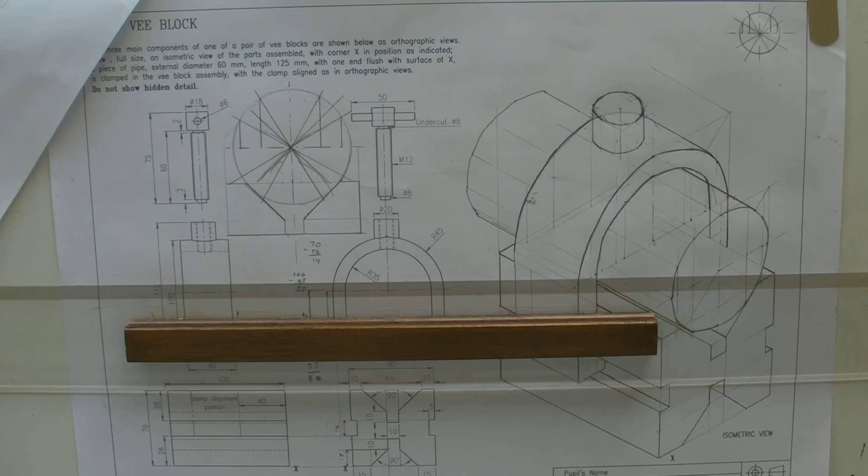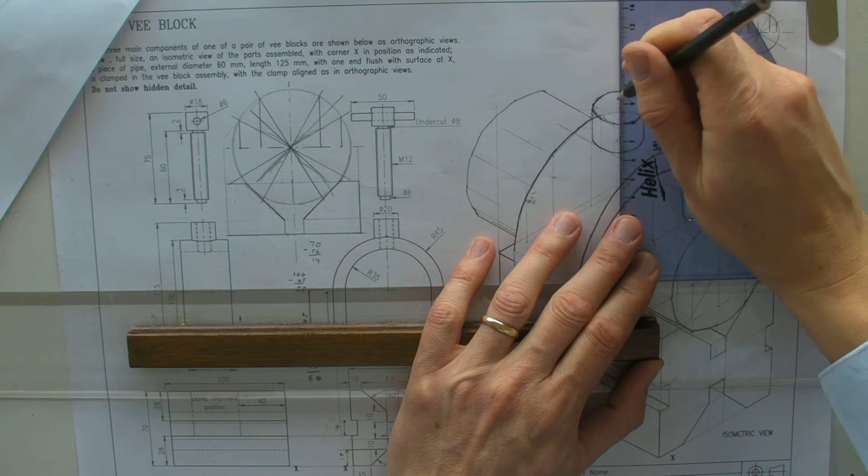Okay, after a bit of thought and consideration, the easiest way to find out the distance from the top of that down at the pipe is to extend the pipe, this line in the pipe back, so that's the highest point in the pipe, and extend the point from the centre point right the way down. And basically that point there is the lowest point, and that's the point that's touching against the top of the pipe. So all we really need to do is measure up from there.

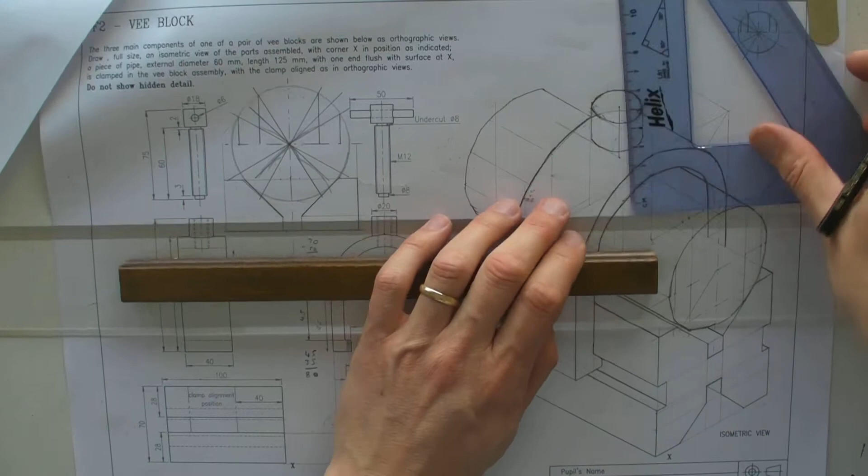So you can see that the overall height of this here is 75 from there to the top. So if you measure up 75 from that point, which takes you to there, that point up there is the very top of this screw bit here.

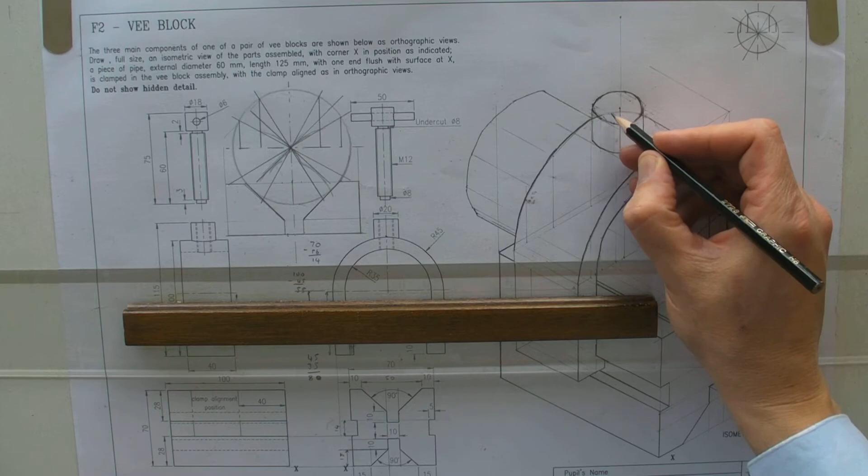Okay, right, what we're going to have to do is we're going to have to form a circle here, which is going to be this part here. We need to extend that up, and we need to do the top part as well. Fortunately, this bit here should be fairly straightforward to do, and some of the very small circles that we have to do, we won't need to produce generators for.

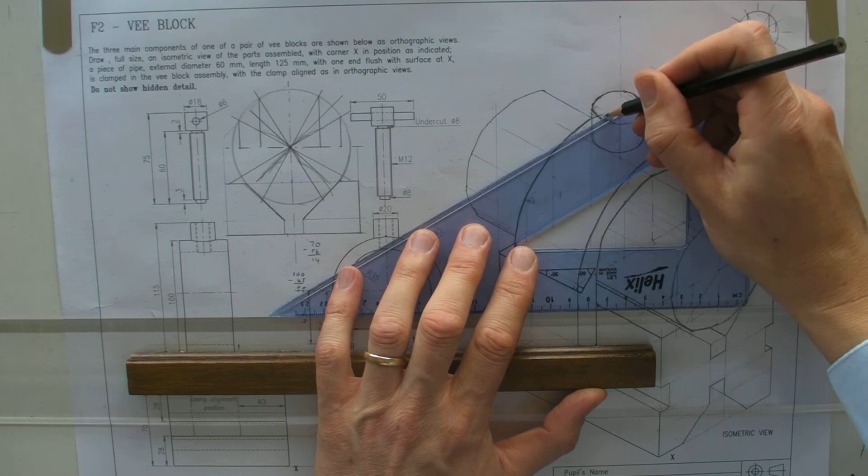But once again, I'm going to have to find a centre line. I'm just going to do it as a solid line just now, and this has got a diameter of 12, so it's radius 6. So measure up that in my compass. I'm going to draw a wee circle of radius 6 this time. There we go.

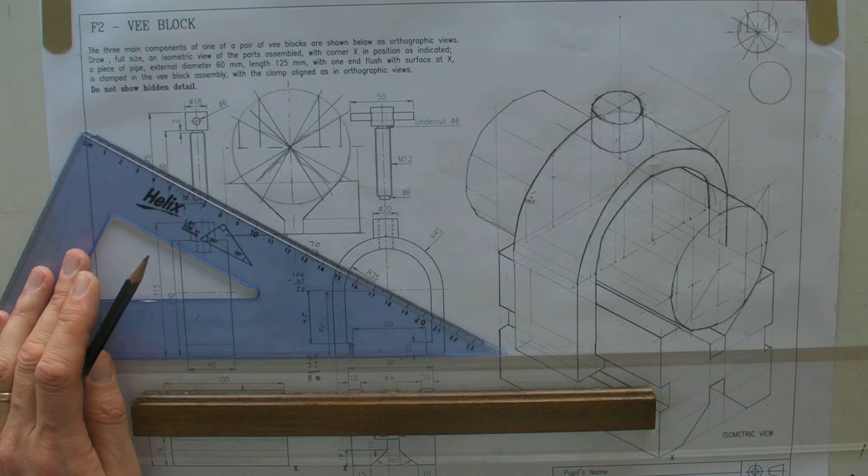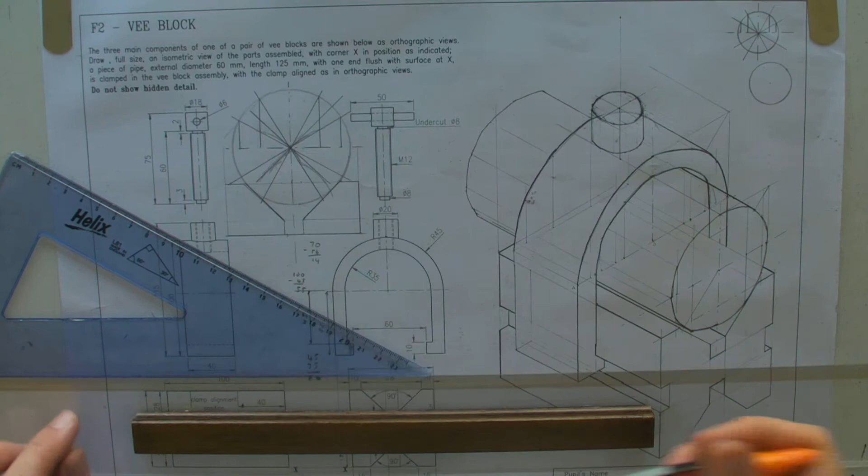That seems a bit big, to be honest. That's M12, but it should be right enough. Let me just check that. I've got it wrong, haven't I? You're probably sitting there going, what an idiot. Me setting it to something wild. So that's wrong. This is more like it this time. It's got a very small circle. So you've got to take a lot of time just to form this up carefully. Okay. So that's more like it.

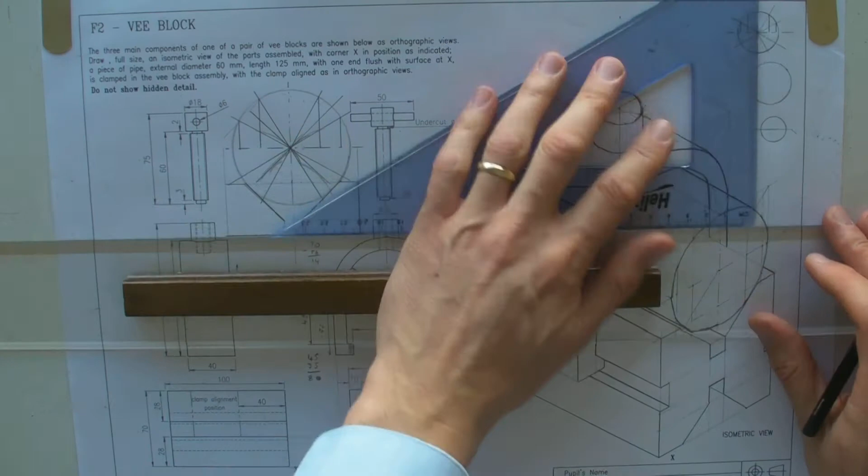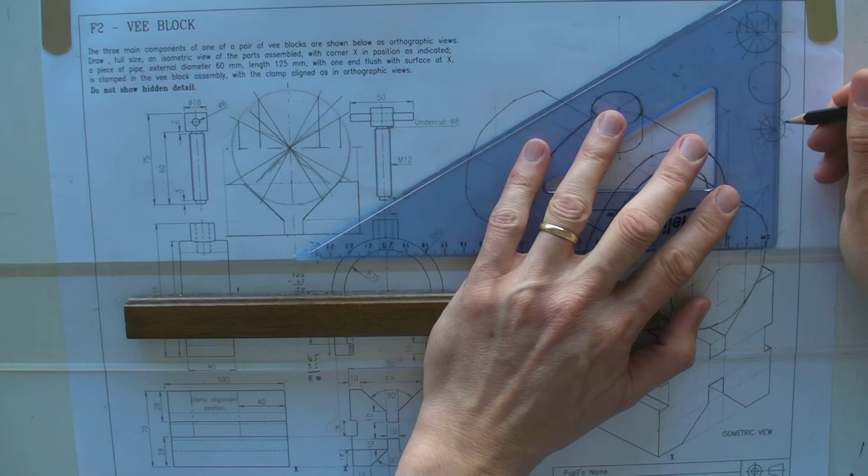So centre lines, generators, just like before. At this point you would feel like you would want to be finished the drawing, because you've done so much of the big parts of it, but you've really got to just keep going. There's a lot to this drawing, as you can see. I'm even going to get a wee bit, not lazy, but I'm only going to measure what I absolutely need to measure here, or draw in exactly what I need to draw in here.

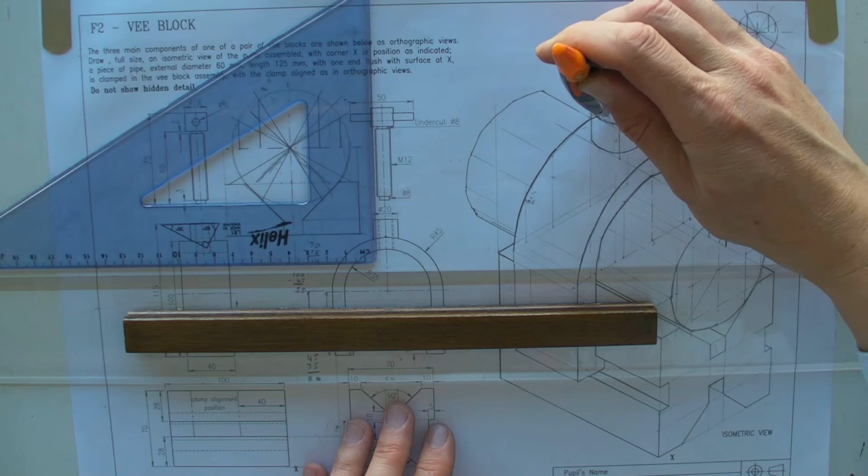So mark a point there, mark a point there, mark these small points. I mean, when you get to very small isometrics, you still got to be careful and making sure that you're being as accurate as you can in everything that you do.

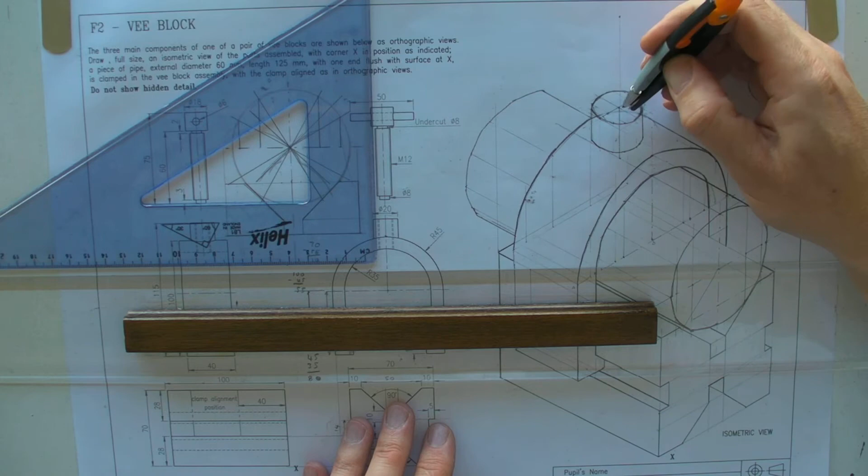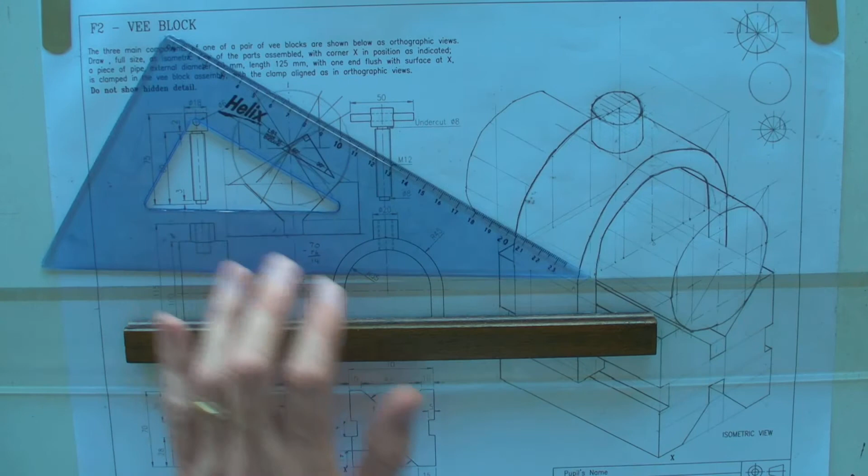Obviously, the kind of tolerance, you're talking very small margins in terms of the length of lines, and a lot of things are the width of a pencil. So that's where a sharp pencil makes all the difference, obviously. So just measure these up and mark them. And clearly the time you take trying to be accurate really makes a big difference here.

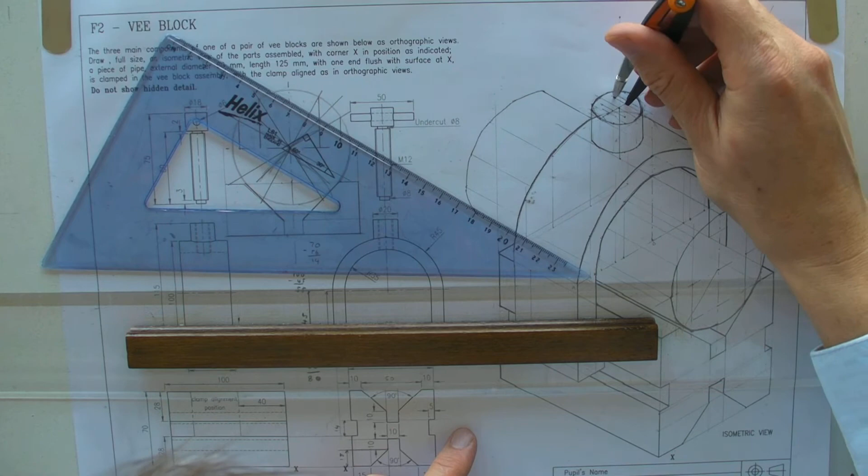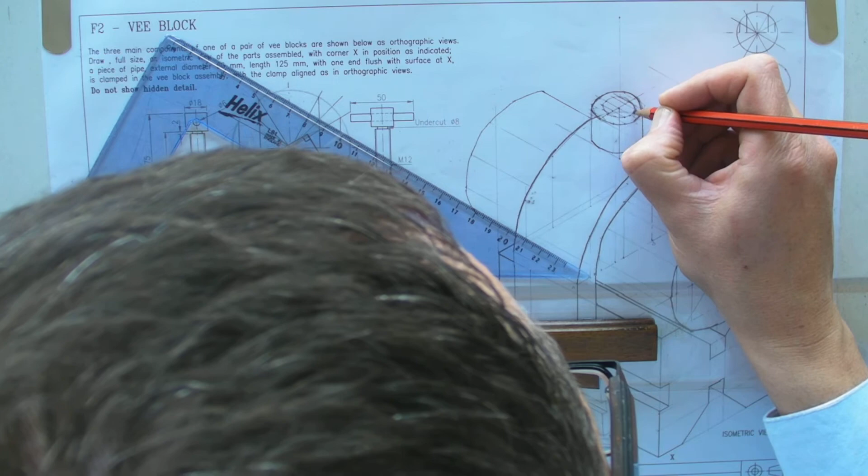Okay, so yep. So carefully just sketch these points in. Big wide circle here. Sharp there. Let's get these in here. Okay. I am rushing this, but I'm hoping you get the idea of what I'm doing as much as anything. Okay. Right, so we'll get these points here, and then I'm going to project up from this.

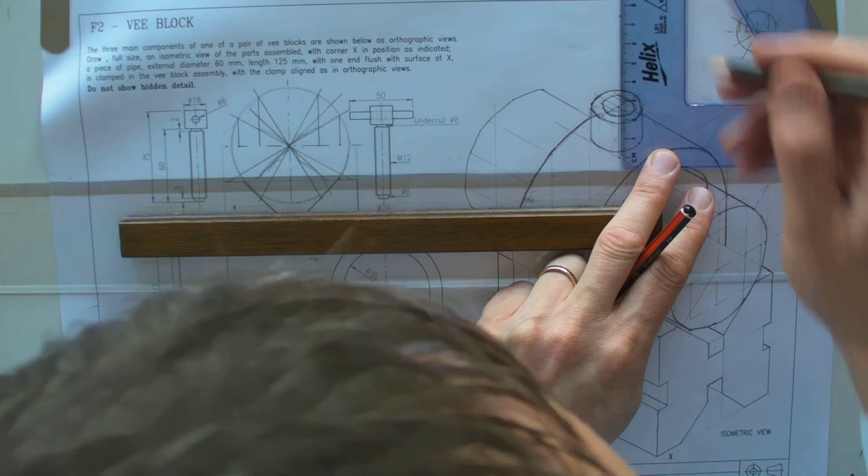Now, to the top of this bit that I'm drawing is 63. So I'm going to measure 63 from that point that I marked previously. 63 millimetres. So that's to there. Okay. Basically, this is going to go up that high. Okay. That wasn't very clever. This is what happens when you rush things too much. Right, so take my time.

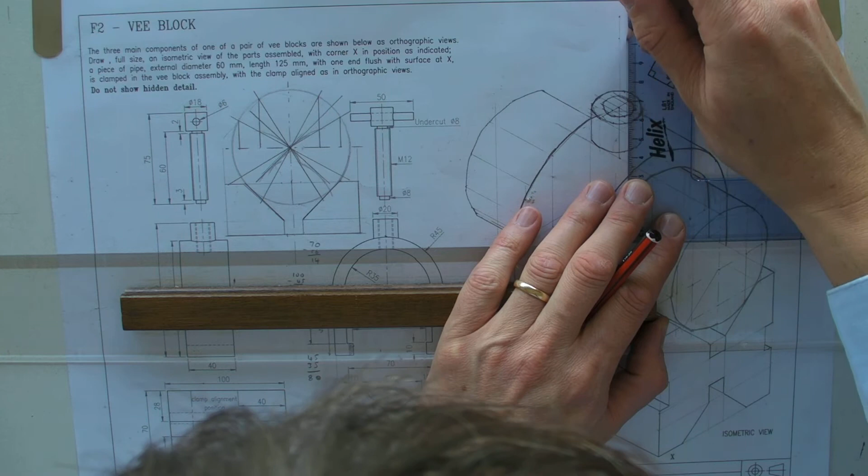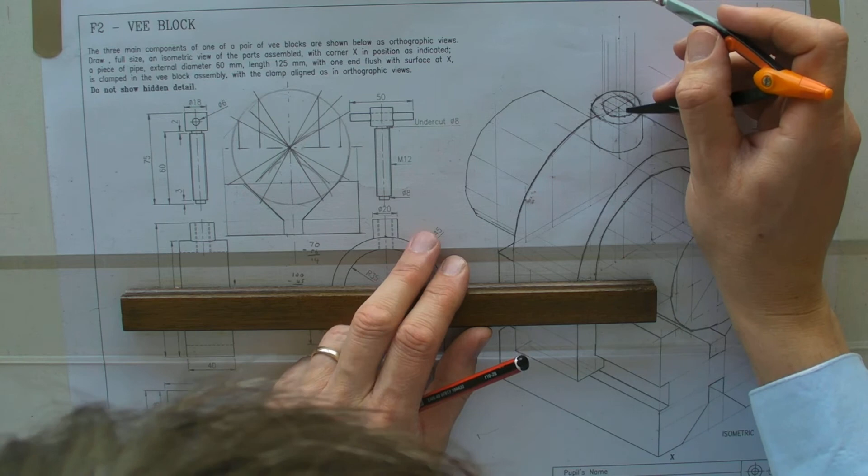Right, okay, so we're going to project up and we'll sort out these heights in a minute or two. I'm just going to project up from all the points that would be seen. Okay, and to be honest, I'm going to judge for myself the tangent point. Okay. So the height, I'll just check it with the compass again. So I measure it from centre line to there, and every one of these points should be the same height.

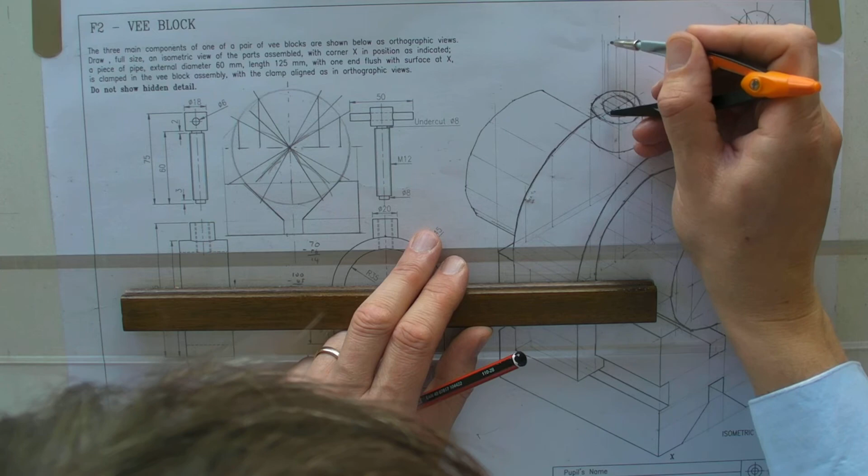Okay, I really should have kept going all the way around. So there's points there.

That's the bell going. That bell going means I need to go and teach.

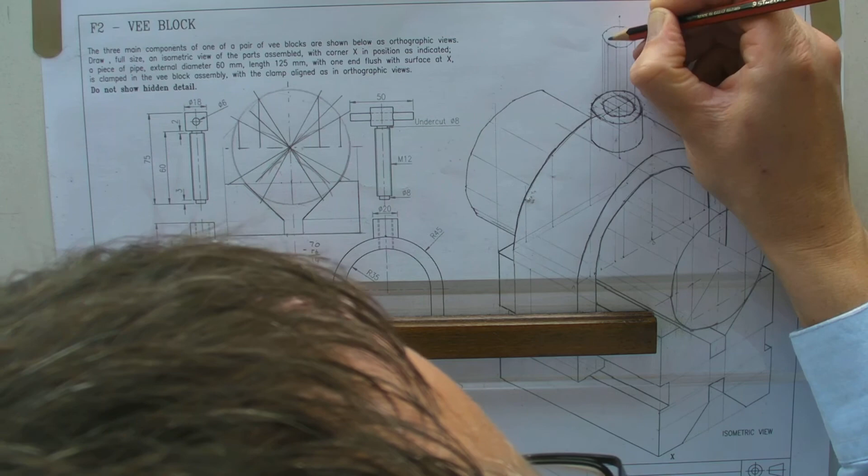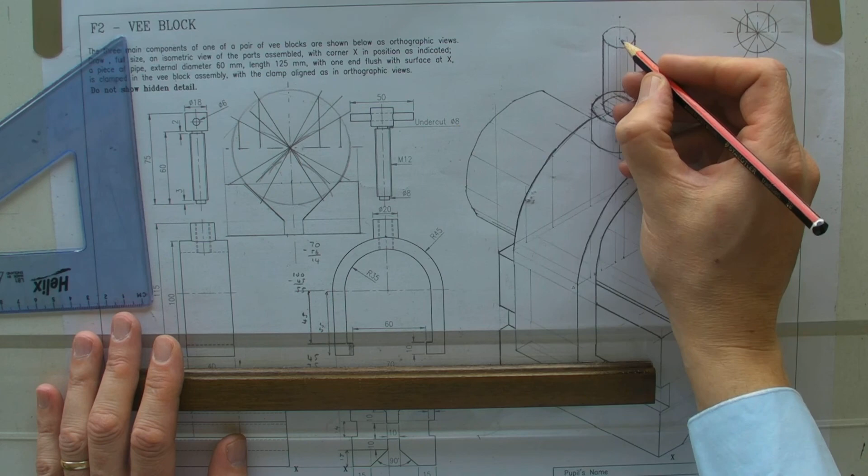So I just quickly draw that in. Okay, you can see I think the tangent point quite clearly in this. So it's down here and here. Okay, so that's us forming up that. The last thing we've got is this. We've got a tiny wee bit up here where it goes up 2 millimetres. There's a wee tiny circle, and then there's this thing on the top which is 18 mil.

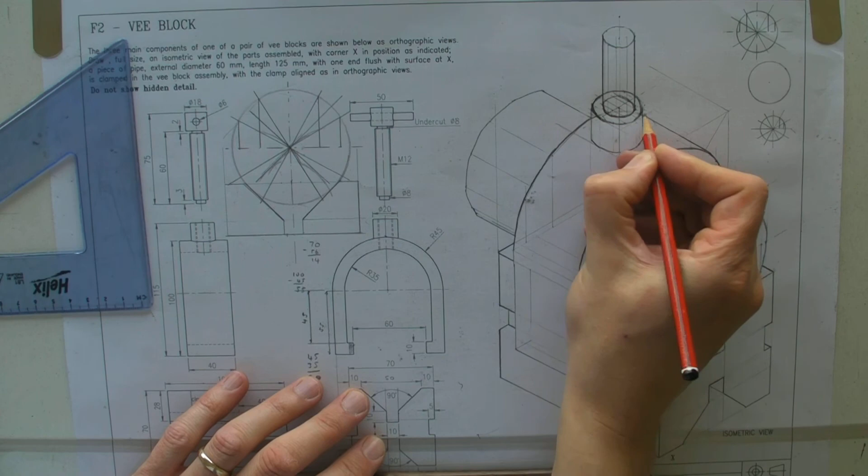I'm just going to firm in these a little bit better just now. Okay, now clearly stuff in the inside of there wouldn't be seen. Right, so you could tidy that up, and really, when you're doing it, they should be so faint that you can hardly see them. Okay, I'm going to stop there because I need to go and teach.